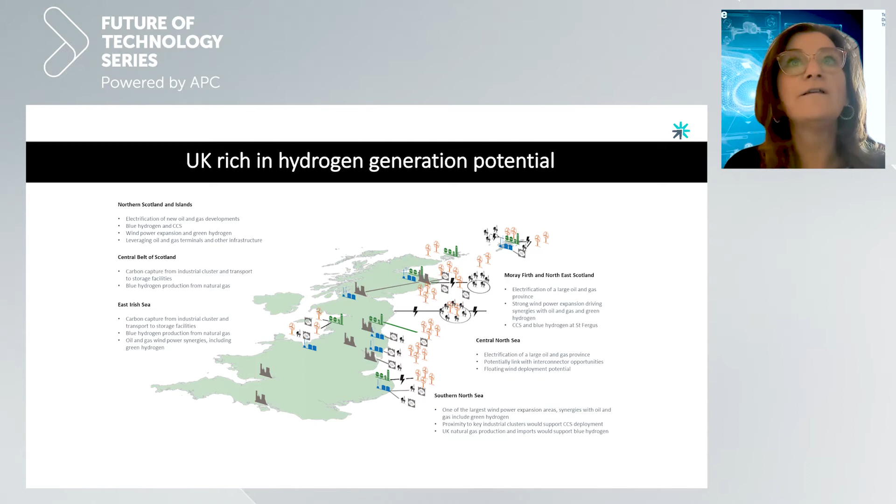But the other thing that we need to really think about, and I know Gareth will talk about this a little bit more, is that hydrogen is an end-to-end challenge. And what I mean by that is, it's not just about, well, if we manage to generate it, we're good, or if we create the demand, we're good. Actually, we need to work out how to generate it, transport it, store it, use it, deliver it. And each element of that has its own technical challenges, which means that this is truly an end-to-end challenge that crosses multiple sectors, and it doesn't care whether you're a car sector or an oil and gas sector or a pipeline provider. Some of the problems are common. So there's problems that are around pipes, pressure vessels, conversion efficiency, storage. All of those can then become common challenges where in reality we could work together.

So if you take that sort of an attitude and look at this complexity of the challenge, this is where we need to start thinking about how we're going to innovate, how we're going to make all of this work so that we don't double dip, that we don't compete, but that we actually share our learnings and accelerate the delivery of hydrogen into the UK sector and become really good at this fast so we can export it to other nations. And that's important for a number of reasons.

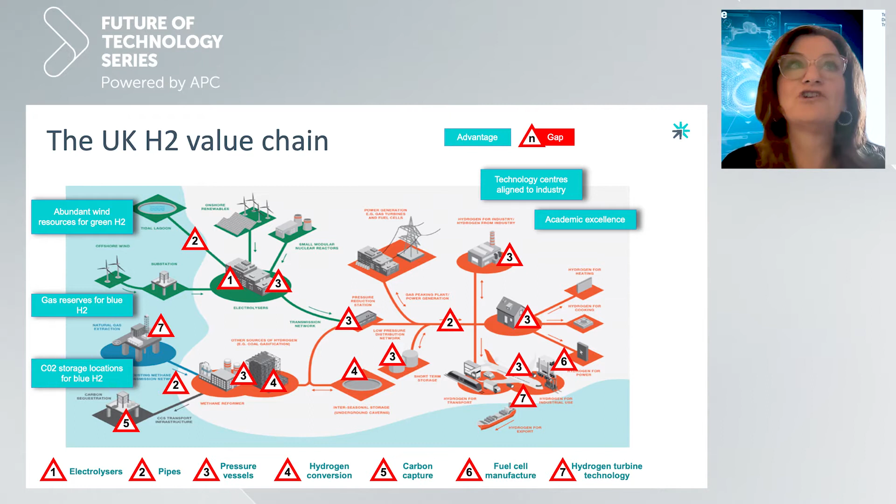So this creates, for me, another opportunity - an opportunity for collaboration. And I think this is part of the conversation today and what Philippa teed up at the beginning. Because it's not a generation problem or a supply problem or a demand problem, but actually an end-to-end challenge that crosses generation, transportation, storage. It's a problem that we can work on together.

So I see this as one of the opportunities for us to come together cross-sector, different technology organizations, different industries, under some sort of clear hydrogen strategy where we can develop, share results, and really use both government funding and industrial funding to drive the change that we need.

And I would say that many of us are already thinking about this. The catapults and OGTC, which I represent, are already working on things like the Hydrogen Innovation Initiative. St. Andrews, in fairness, has already put in a hydrogen accelerator. We need a nationally connected hydrogen technology concept where we have these hydrogen accelerators, we have projects going on, but they're all connected and in service of a national mission to become a hydrogen economy.

I believe that we actually have, as a nation, the skills to do it. We have the natural resources. We have the capacity, both intellectual and financial. But I would say so far that our approach is disconnected, goodwill-based, and quite sporadic. If we're actually going to win this as a global challenge, we need an industry-led commitment to hydrogen economy.

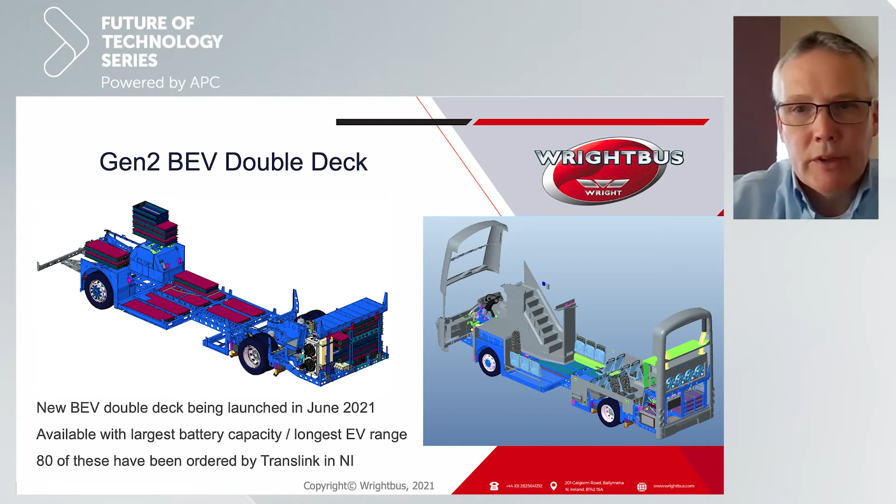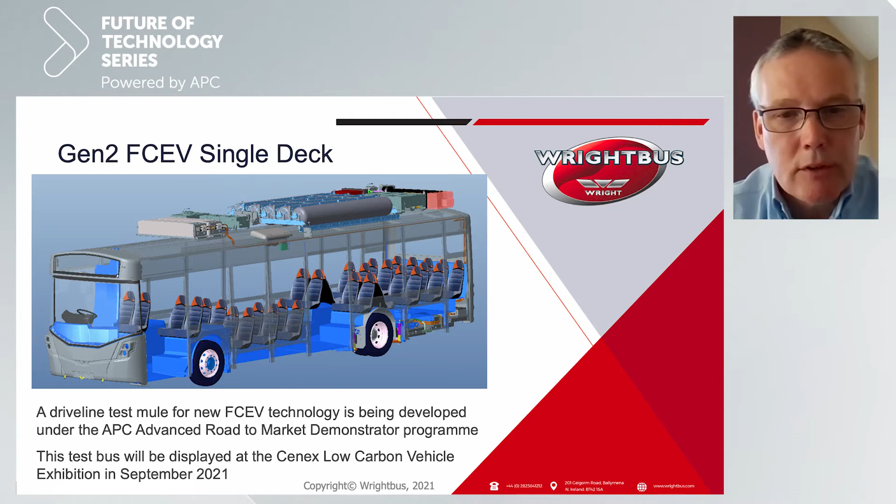This is our Generation 2 fuel cell EV single deck, which is being designed at the minute. A driveline test mule for this new fuel cell EV technology demonstrator is being developed under the APC, Advanced Road to Market Demonstrator Programme. This test bus will be displayed at the CENEX Low Carbon Vehicle Exhibition in September 2021.

We also have involvement in Advanced Propulsion Centre 17 programme. Under this programme, which will start for us in May 2021, we plan to develop a complete new family of fuel cell EV buses, utilising new driveline technology and an integrated supply chain, designed for export around world markets. So we're going to have a new fuel cell EV 12-meter single deck bus, a new fuel cell EV 18-meter articulated bus, a new 10.6-meter 2-axle double deck, and a new 12-meter 3-axle double deck. There's very much a pull in the international market for these types of vehicles - there's more demand than there is supply, and this gives Wrightbus lots of opportunities for growth and for export.

So what is a fuel cell EV? A fuel cell, to start off with, is a solid state device that converts hydrogen from onboard storage tanks and oxygen from the background air into electrical energy. That electrical energy is then used to charge a small battery. From that point onwards, it really operates the same as a battery electric vehicle. We have an electric traction system, and the battery allows the recuperation of energy during braking. The only emission at the point of use is distilled water.

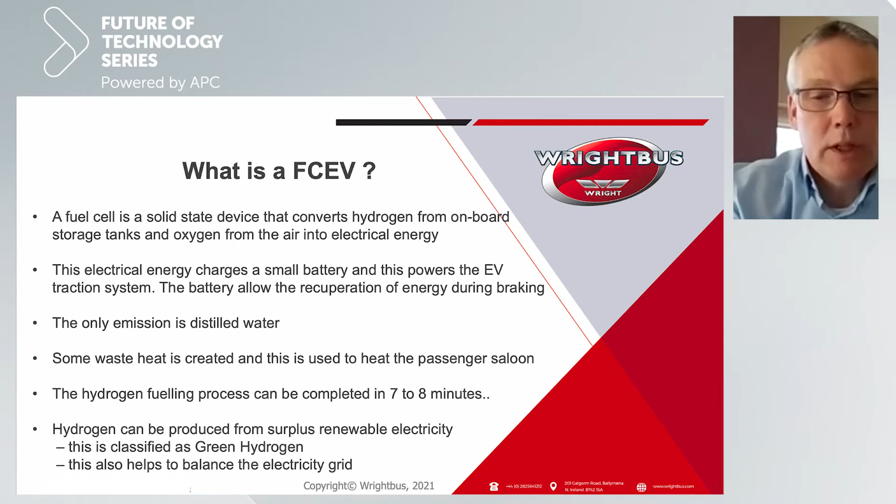Some advantages of fuel cell EV over battery EV, especially in the bus market: the bus daily range is typically much higher. A battery EV vehicle, even our vehicle with 432 kilowatt hours of batteries, can only achieve 190 miles. Now that's okay for inner city and somewhere like London, but routes that are intercity or rural routes, it's nowhere near enough. The problem is more batteries means more weight and more cost.

The fuel cell EV can easily achieve more than 300 miles. It performs much better when passenger heating is needed in the winter, and it's very suitable for places like Dubai, Hong Kong, places with hot climate where you need aircon. Refueling time is only 7-8 minutes for fuel cell EV, whereas 4, 5, even 6 hours is needed to charge a battery electric vehicle. Buses want to operate 22 or even 23 hours a day.

Fuel cell EV is the only option if the bus garage is far away from a 33 kV electrical grid supply. 100 buses can need the same electricity supply as 5,000 houses, so it's a pretty significant amount of electrical energy. For a 100 BEV bus garage, significant additional land is needed to allow the installation of all the individual EV battery chargers. Probably important for Wrightbus is that there seems to be many more international opportunities for us to sell fuel cell EV buses compared to battery EV buses, which is dominated by Chinese bus suppliers.

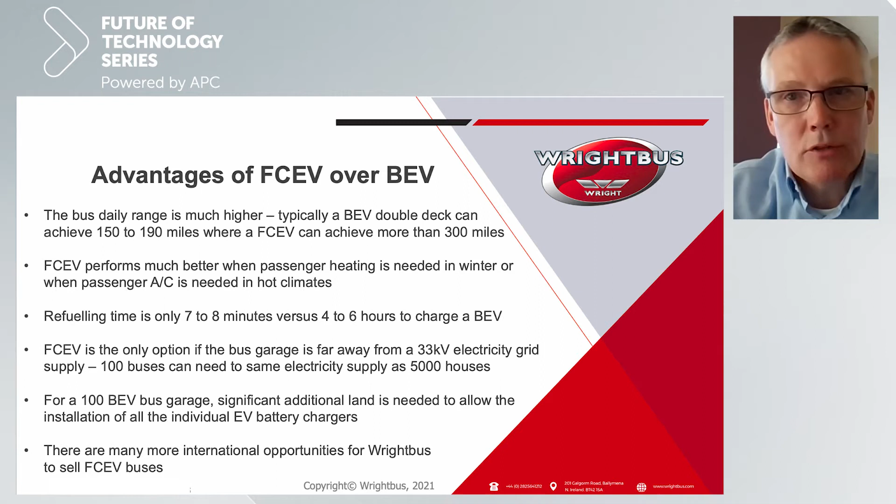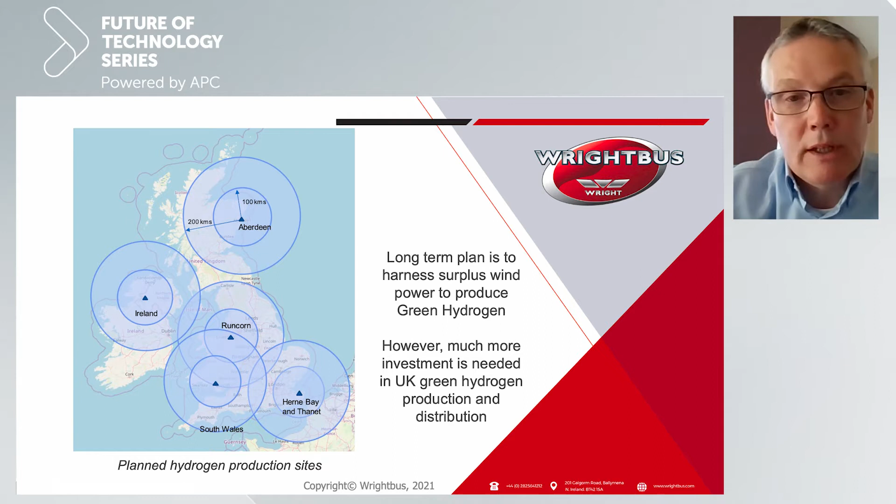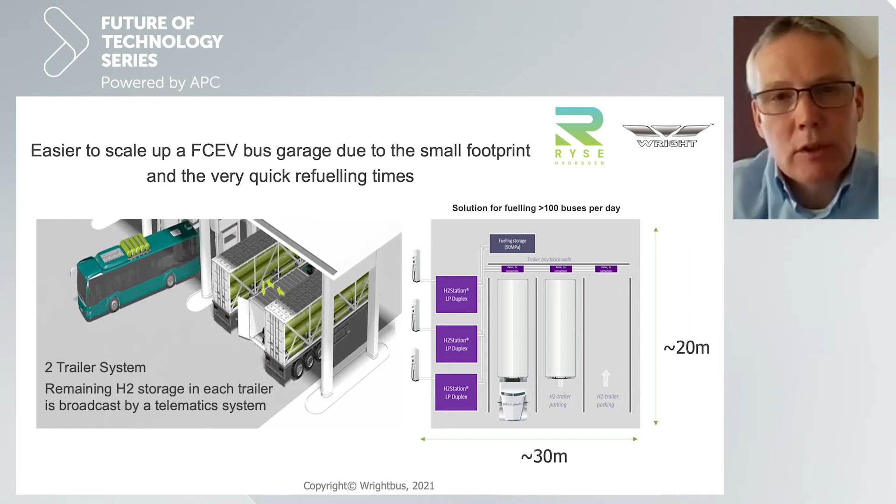Just for the engineers in the audience, a few details about components. This is our single deck vehicle.

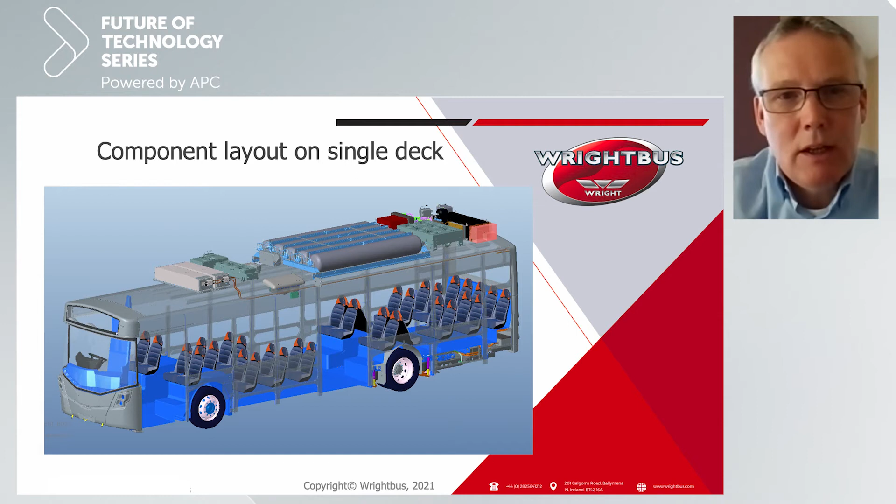At the front of the vehicle, we need a lithium battery to deal with the peaks and troughs in energy demand, and it needs cooling. We have hydrogen storage tanks which store around 38 kilograms, and we have a version for 50 kilograms as well. That allows easily more than a 300-mile daily range.

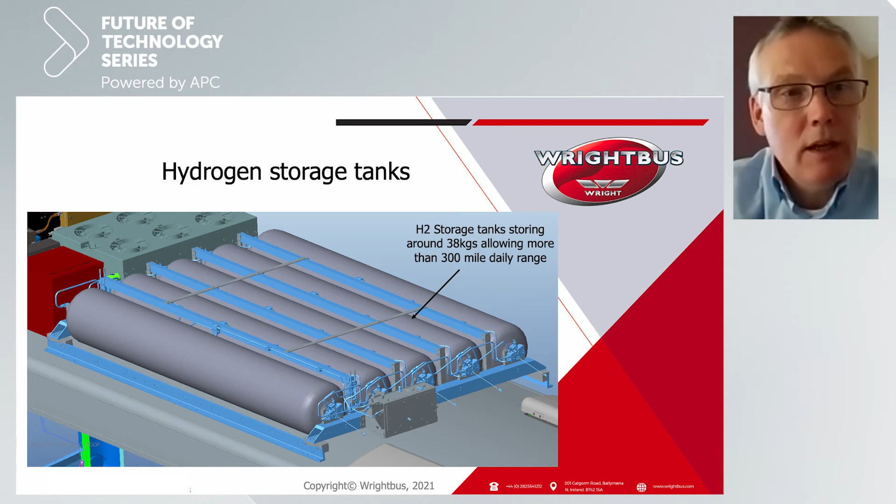We have the option of a 70 kilowatt fuel cell at the minute, or a 100 kilowatt fuel cell, that's the black item at the back. And of course, we still need an electric traction system in the same way as a battery electric bus. So we need a permanent magnet drive motor, a drive inverter system, and a high voltage power distribution system.

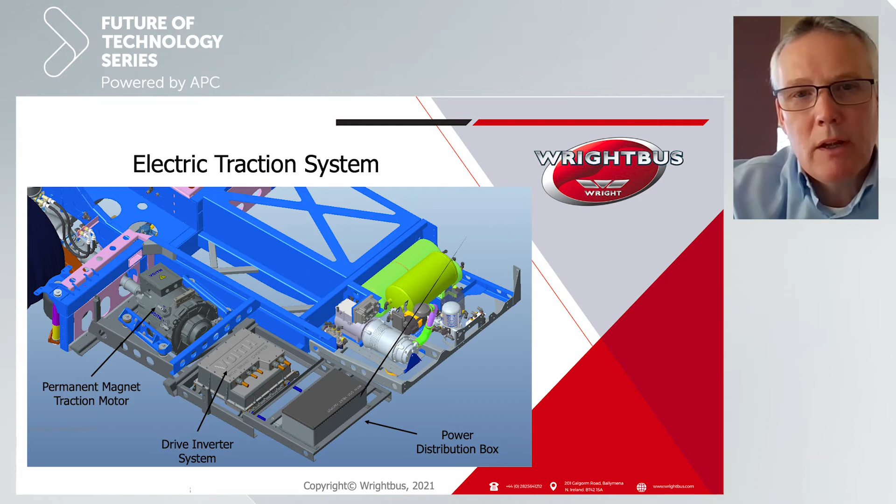So that was the slides that I wanted to cover.

Hello everybody, I'm from E4tech and I'm here to talk about how we make sure that the hydrogen that's supplied to all of the uses that Colette talked about and to Brian's buses is low carbon, what are the ways that we can do that, and how do we make sure that it happens?

As a quick introduction, E4tech is a sustainable energy consultancy based in London and in Lausanne, Switzerland. We've been working on hydrogen and fuel cells, as well as other energy systems questions and low carbon transport generally, for over 20 years. We also publish annually the Fuel Cell Industry Review, the leading annual review of what's going on in fuel cell markets, numbers of shipments and things like that. You can download that if you're interested in more data behind hydrogen and fuel cell deployments in the transport sector.

One of the areas that we look at a lot is the sustainability of these different options, and that's what I'm going to be talking about today.

As Brian's just been discussing, we're talking about hydrogen in this forum today because there are lots of advantages of hydrogen fuel cell vehicles amongst all of the other options we've got for decarbonising transport, which vary quite a lot depending on what mode you're talking about, the size and weight of a vehicle. I put in a graph here from the Hydrogen Council showing where they see hydrogen fitting within the suite of low carbon options for different technologies. So lots of advantages to using hydrogen.

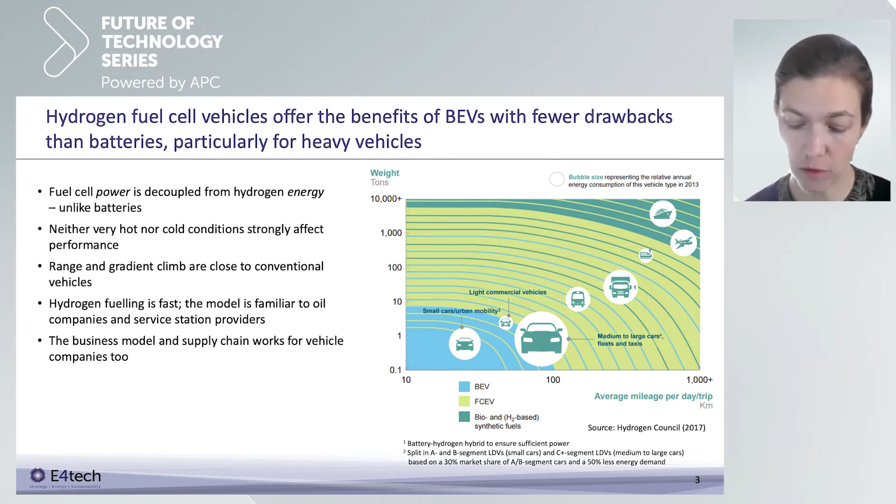The way that we look at this typically is through life cycle analysis, shortened to LCA. This is a way of looking at all of the impacts of providing a service, in this case transportation, driving a car a certain distance. Life cycle analysis takes into account all the parts of the life cycle of doing that: what does it take to produce the vehicle, what does it take to produce the fuel, what are the impacts in using that fuel, and what are the impacts at the end of life of the vehicle?

Now, you can do this across lots of different impacts. You could do it across water use or air pollution or all kinds of different things. But today I'm mostly going to be talking about greenhouse gas impacts because this is the key challenge really when we're talking about different hydrogen production routes.

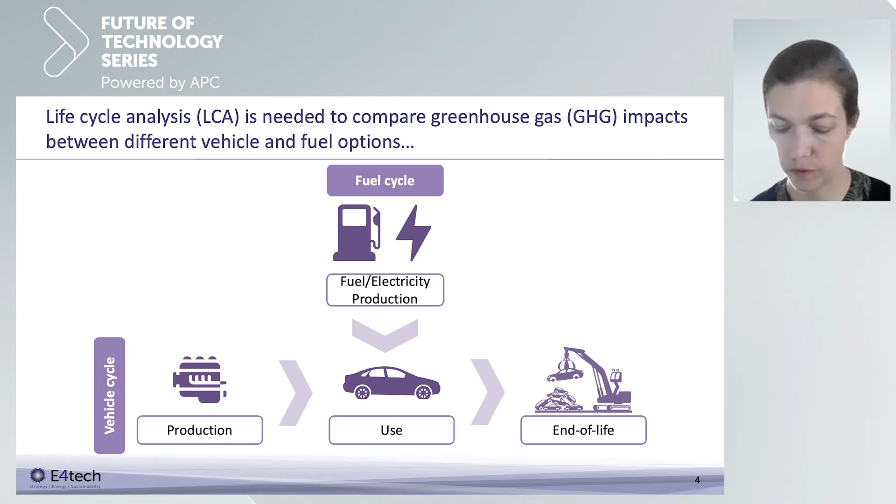So we and others have done life cycle analysis studies that look across different types of vehicles. This is some analysis that we did in 2018, looking at different types of cars and the greenhouse gas emissions, expressed in grams of CO2 per kilometre, and looking at how much of those come from producing and disposing of the vehicle, how much come from fuel production, how much come from actually using the fuel - carbon dioxide that comes out when you burn fossil fuels, for example - and how much comes from vehicle maintenance. I'm not going to talk through all of this, as I only have 10 minutes.

The important point I want to make is that for most of these different types of vehicle, most of the emissions are related to the fuel itself. You can see that from looking at the mid-blue fuel production and fuel use parts of these bars. And if you look at the area highlighted in green, which is the fuel cell electric vehicles, you can see that the numbers vary hugely.

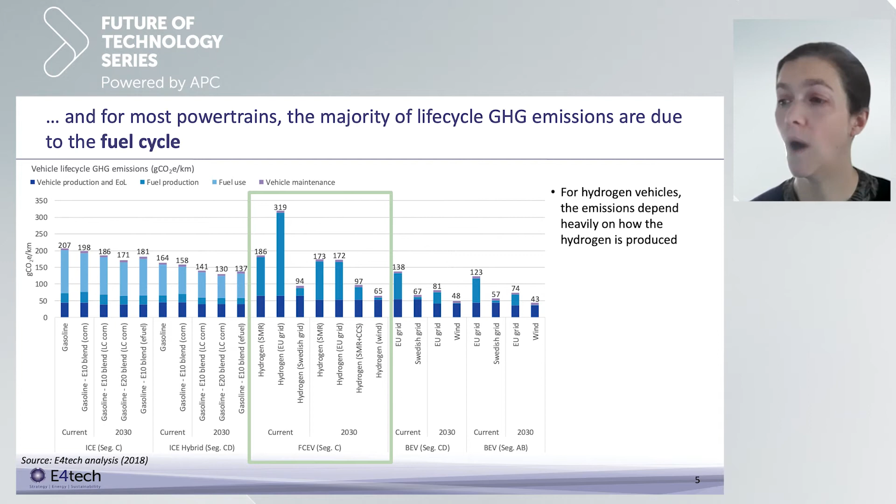The reason that these numbers vary hugely is due to this mid-blue fuel production bar, where the way in which you make the hydrogen has a huge impact on the greenhouse gas emissions. Colette talked a bit at the beginning about the different ways that you can make hydrogen, and there are many different ways to make hydrogen.

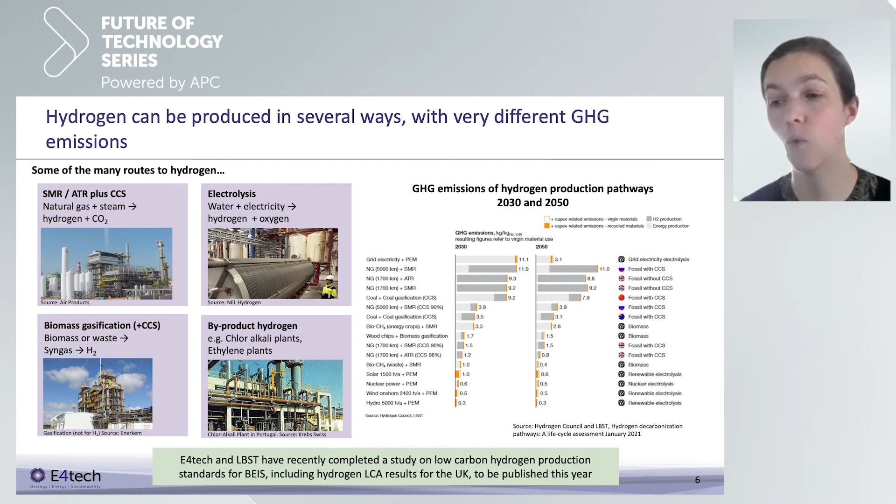But importantly, there's also byproduct hydrogen from existing industrial processes, and there's also the option to produce hydrogen from biomass or even waste. So as I was saying, lots of different ways to produce hydrogen.

This is a graph made by LBST, another consultancy who did this study for the Hydrogen Council, that just shows the range of emissions factors that you can get depending on how you produce hydrogen. And this is only how you produce it. As I said, a UK specific study on this that we've done together with LBST will be coming out later this year, which we've done for BEIS.

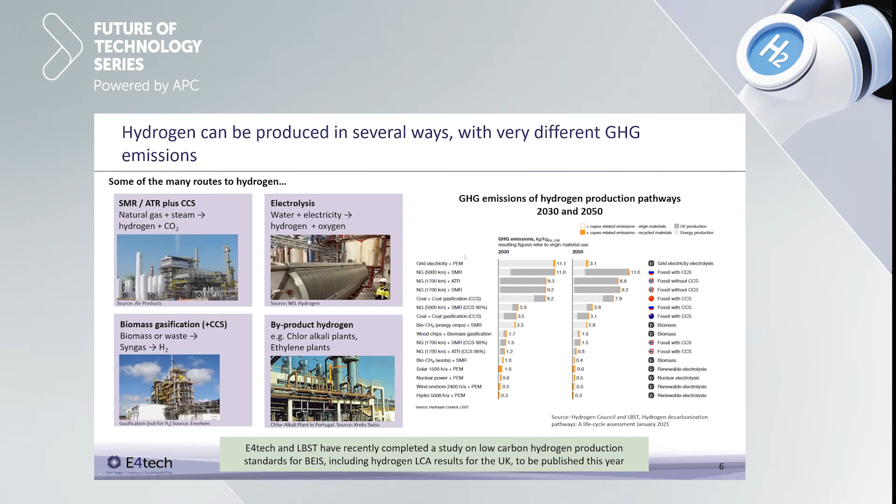But the important thing is that these purple boxes on the left-hand side, these different ways of producing hydrogen, you can't make generalizations about and say this one's better than that one, because there are lots of different, very specific details of what the supply chain looks like for hydrogen, where it is, when it is, that really affect these greenhouse gas emissions.

So a few things to bring out: use of grid electricity. Now obviously this is most important if you're running an electrolyzer off grid electricity, but it's actually also important for lots of other parts of the chains - compression, and any electricity use in any of these other chains. If you're using grid electricity, then the difference you can see here between 2030 and 2050 is huge as grids decarbonize. And obviously the grid electricity factors between countries vary hugely as well.

As Colette talked about, if you're going to enable blue hydrogen routes, if you're going to enable use of fossil fuels, then you need CCS. You can see the big difference between these routes at the top, which are fossil without CCS, and those that include CCS down here. The ones at the bottom are typically renewables and nuclear routes that give very low greenhouse gas hydrogen results.

And also biomass feedstocks give pretty low results, but that can vary quite a lot depending on the source of the biomass that you're using.

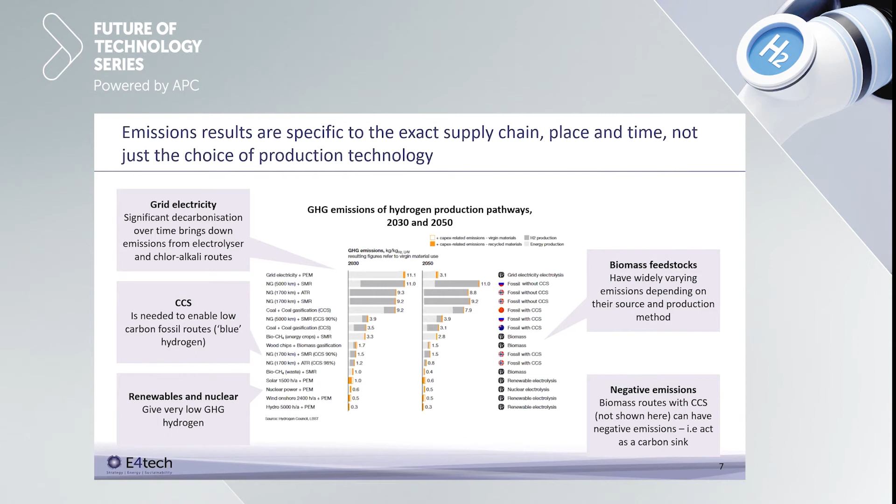Also, something that we've modeled in our study for BEIS but is not modeled here is routes that end up with negative emissions. That could happen if you have a biomass route where effectively you're gasifying the biomass, taking the CO2 and sequestering it, and then using the hydrogen. If you store that CO2 permanently, then effectively you've got a negative emissions route - something that's providing hydrogen as an energy carrier and also providing a carbon sink.

But as mentioned before, this is an end-to-end system. Production of the hydrogen is not the end, it's the beginning. There are lots and lots of different ways that hydrogen could be used in different sectors, and to get it from the point of production to the point of use, there could be a whole range of different downstream options.

These options relate to how you transport it, whether you compress it, to what extent you compress it, whether you liquefy it, how pure it needs to be, whether you convert it into a different kind of energy carrier like ammonia. All of those have emissions, and emissions from some of these could actually be larger than the production emissions itself, depending on which production pathway you've used.

So there are big variations in these factors to do with whether you liquefy, how much electricity you use in this process, how far you transport - but there are also quite a lot of uncertainties. So, if you put hydrogen through a pipeline, what contaminants does it have, and therefore what do you need to do to purify it to use it in a vehicle?

So I don't want to scare you all with these slides by saying there's a huge variation here, because these things are measurable and in lots of cases are manageable. But it's just important to do that to ensure that we get the savings that we want.

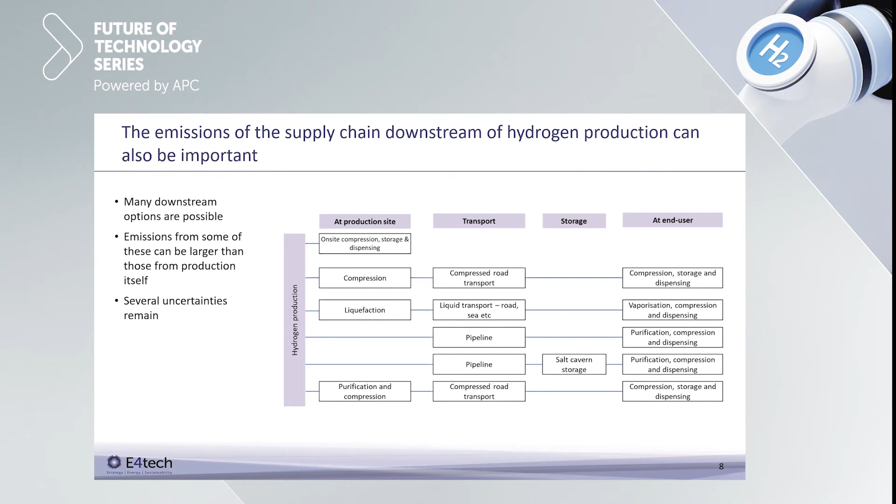As you'll have seen, even the graphs I've shown don't give you the same results for the same pathway. You can only do this by having a common methodology. Typically those common methodologies are codified in standards, and those standards are used to underpin various activities to make sure that we get the savings that we need.

So there are voluntary standards that have been developed. One of the most high-profile ones at the moment is CertifHy, which is a voluntary scheme that acts as a guarantee of origin for green or low carbon hydrogen in Europe.

In the UK, we also have policy that does this. We have the Renewable Transport Fuel Obligation, which incentivizes use of renewable fuels, and hydrogen can count towards that. Renewable hydrogen can receive credits under that scheme as long as it meets sustainability criteria, including 60% greenhouse gas savings, though there's actually a consultation out on increasing that to 65% at the moment.

And as we see more hydrogen use across the economy, there may be other policies developed that help to support hydrogen use across other sectors. And then you've got to work out how we develop a low carbon hydrogen system that works for everybody.

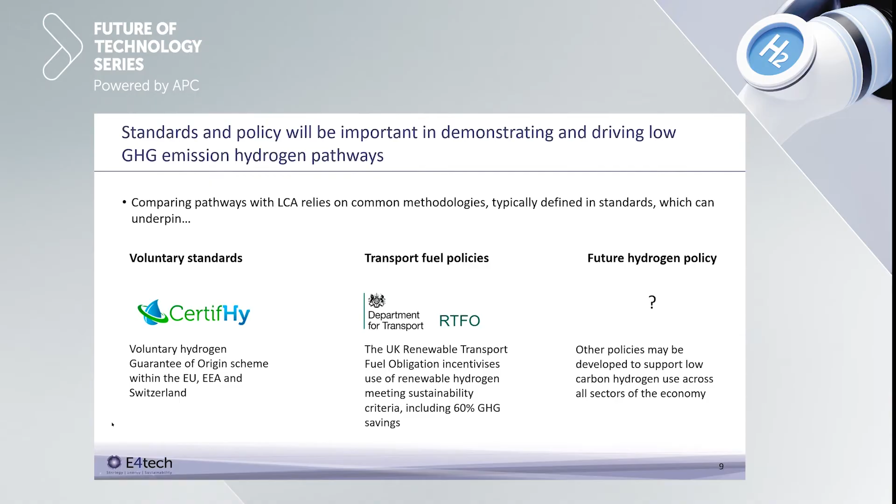We've had some great talks and presentations today on hydrogen and setting some of the scene for why hydrogen is picking up momentum. And what I want to reinforce here is to echo a few words that Colette said around the need for connected innovation and how important innovation is.

So I'll set up some context of the Hydrogen Innovation Initiative, which is something that we're working on with a number of partners involved here. And then I'll go into a little bit more detail on a specific area of interest, obviously as the National Composites Centre, on some of the pressurised storage tanks that are very relevant for transportation.

So current collaborators on this concept are very much looking at coming together as a catapult network and the technology centres, so the OGTC, the APC, the ATI and NPL. With the catapult network, as I said, we came together and said, right, hydrogen is increasingly significant across all of our sectors. How do we accelerate the activity and make sure that we get the most value for the UK?

So what we don't want to see is a hydrogen economy developed without the right investment in innovation and UK supply chains, so that we don't lose this opportunity to actually develop the value in the UK supply chains. And we think that's really important. So between this network, our role in industry and innovation is to accelerate technology, the adoption of innovation, and to help drive that development in the UK for UK value.

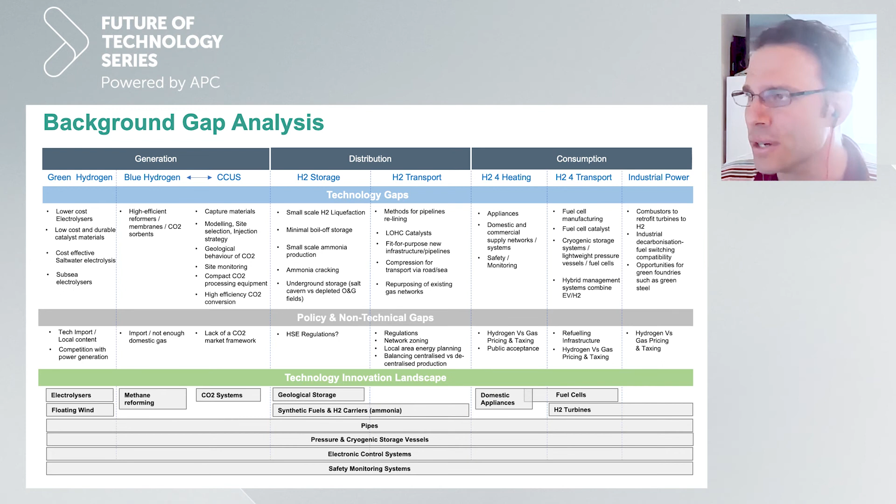And we're seeing that much more prevalent post-pandemic as companies are looking beyond their traditional markets for future economic sustainability. So what do we propose to do? This is still evolving and developing, but what we're trying to do is create a connected innovation ecosystem, specifically focusing on accelerating hydrogen technology.

So there's great activity that will happen at academic level, but we want to make sure that for the key strategic priorities for the UK, that we have very good articulation of challenge-led research that are solving challenges that industry need. And through this mechanism, we also provide excellent routes for technology exploitation at the kind of mid-TRL, which is very much where the catapults have been designed to help bridge.

We want to see that we have a strategic focus on the technologies that we're developing to help industry, and that we have a direct route to support industry to deploy those technologies to create that IP and then industrialize it with our partners and the funded programs, for example, the OGTC, APC, ATI - that's really their business as usual in terms of doing that.

So we looked across generation, distribution, consumption markets. There's multiple markets within that, but really essentially also what we're trying to create is the cross-sectorial green threads, as I call them. So connecting how do you actually take green hydrogen, for example - where do you produce it? How do you distribute it?

Where does it need to be for an aerospace market, for example? What's the infrastructure requirement for an airport? How does that connect with places? How does it connect with international hubs for air transport so that we have those roadmaps for deployment?

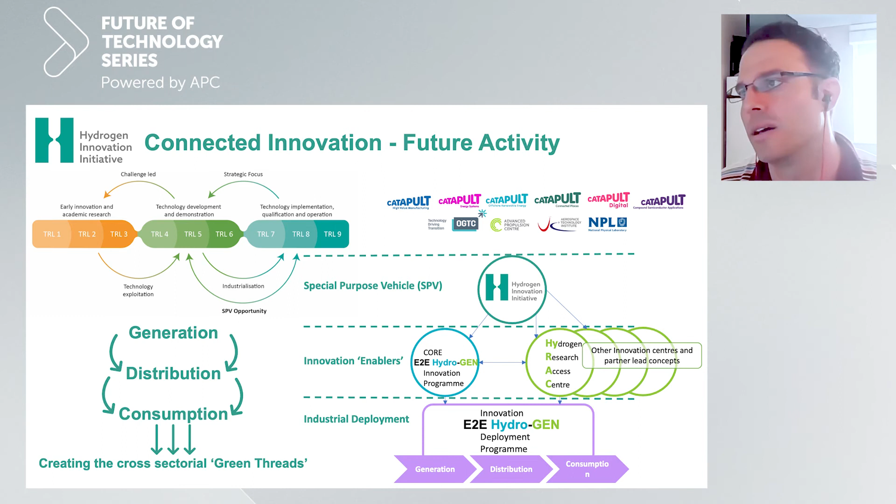And then how do we deploy those into industrial programs of work with industry and the collective partners within each sector. So I'm going to dive down a little bit more specifically on some of the technology challenges.

For the National Composites Centre, obviously there's the opportunity for composites. I'm going to still skim across this at a fairly high level.

So across the value chains, we're looking at the generation requirements, offshore, onshore distribution, spoke distribution, so where you have actually local production rather than decentralized production versus centralized production, into the consumption markets, and then into energy generation as a consumption market as well.

And the three priority products for composites that are going to add value across multiple sectors are pipes, pressure vessels, and cryogenic storage tanks. So there are various applications with known specifications.

Requirements for those technologies, and some that we're developing and working on with industry partners to identify what are the strategic priorities for those technologies, what are the challenges that industry needs support in solving, so that we can really truly accelerate these technologies.

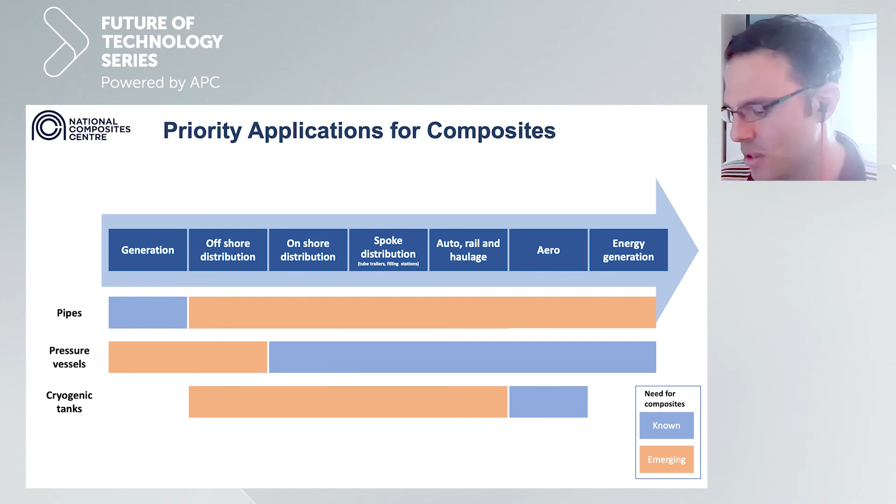So some of this won't be a surprise to you, and E4tech obviously are much well versed on the economic side of this, but the value proposition of fuel cell electric vehicles and hydrogen propulsion is increasing, and you can see some great road mapping activity from the APC here that have identified the role that CFRP and composite tanks will play in that, to actually reduce the weight requirements of that fuel cell fuel storage capacity for hydrogen.

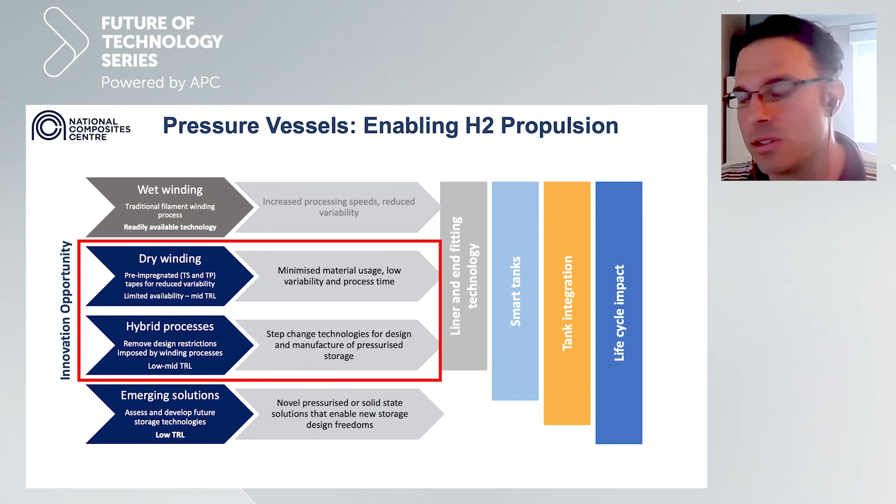And a great study that I picked up with Deloitte in China really looked at the break-even points for fuel cell electric vehicles compared to some of the incumbent technologies. They will vary in different markets, but the composite pressure vessels, because of the inherent cost of carbon and they're not prevalent in the market at the moment, there's a huge opportunity to actually drive down the cost, increase the innovation in those technologies for a mass market, production market that we'll need to get to really see us drive those costs down.

So the role that we play at the NCC is very much around the design, materials, manufacture, and the certification of the latest composite technologies for these pressurized vessels, looking at the next generation of smart tanks, automated technology for manufacture to really drive that cost base down, increase the reliability, and drive weight down even further in these tanks, which will enable much more efficient hydrogen propulsion systems and reduce the whole life cost of those vehicles for industry and increase adoption.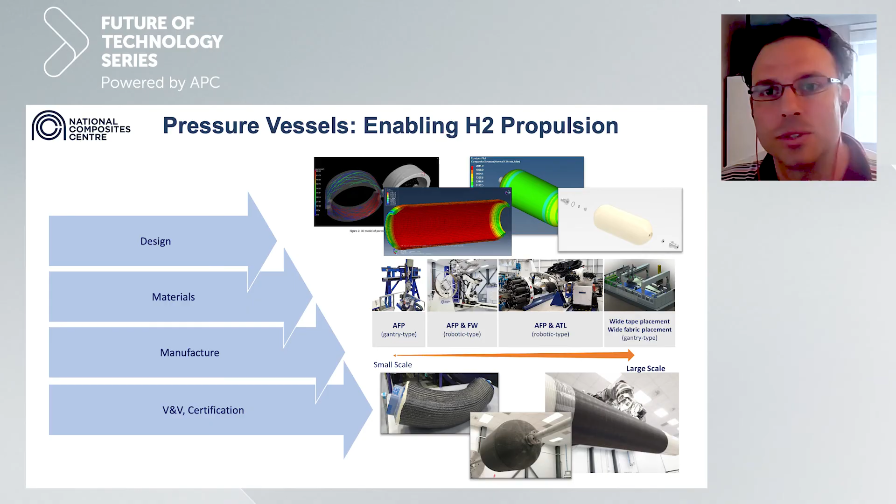Our first question is going to come from Rebecca Watson. Are you there, Rebecca? Every time I listen to these webinars, I always feel like it just feels like a no-brainer. There's clearly lots of amazing technology, there's clearly lots of opportunity, but obviously with opportunity comes competition. And I'm just wondering if the panelists have a view on what more government and or industry could be doing to ensure that we can maximise on these opportunities for the UK.

Colette, maybe, do you want to start off with an answer on that one? Yeah, happy to. I mean, I completely agree.

I think there's a lot of discussion and there is clearly a lot of opportunity, but it's hard to get into action because the reality is a lot of this is expensive, and you can't just solve the problem locally because it won't be impactful enough. So it has to be across the UK. So we do need a little clarity on policy. The hydrogen strategy from the UK government is critical, and then turning that into meaningful policy becomes even more important. And I think the work that's also ongoing now on the innovation strategy is important, because what we've talked about is there are technologies, but we've also highlighted some really big common challenges to making hydrogen in particular affordable as a net zero solution for the UK and globally.